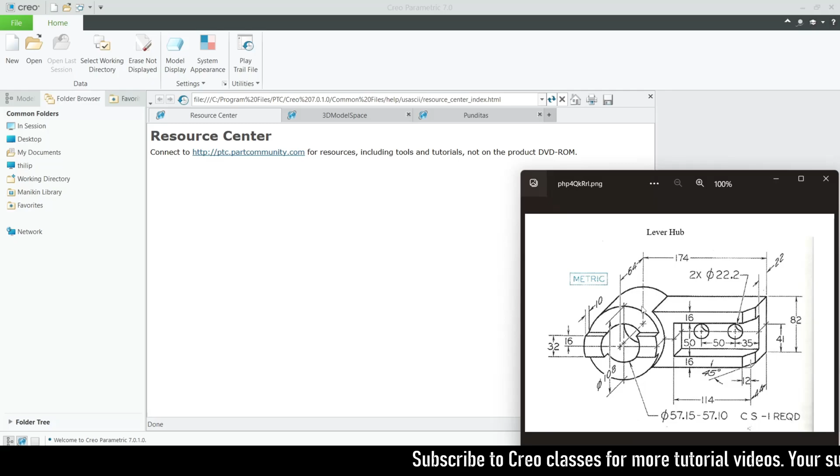In this video, let's see how to create this lever hub using Creo Parametric. First, we need to analyze this diagram and then convert it to the design. We need to create an outer circle with a diameter of 108, and the inner circle, which they've mentioned as a diameter ranging from 57.15 to 57.10.

Let's continue with this circle. First, we need to select the working directory, the same one we've used for the last few videos. I'll select this as a working directory, click on new, click the default template, and rename my file as Lever Hub.

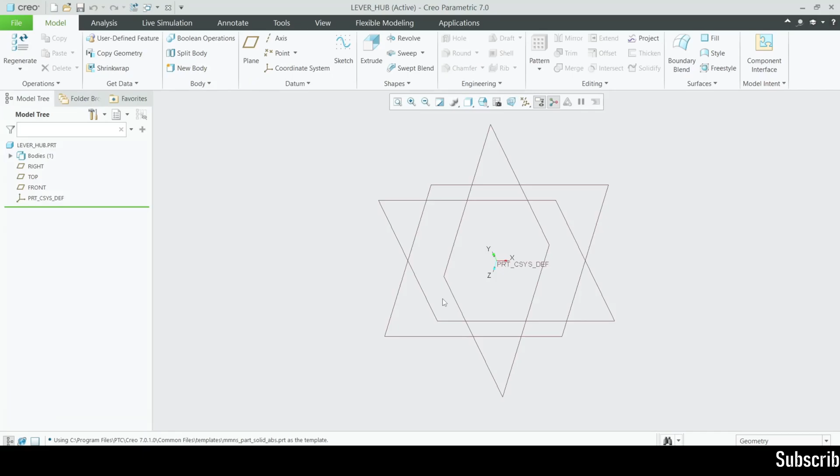Click OK. Now we need to select the template since we unclicked the default template. I'm going to select this as MMNS Part Solid ABS. Click on OK. Now I'm going to start this sketch with my front plane - go for front plane, sketch, and sketch view.

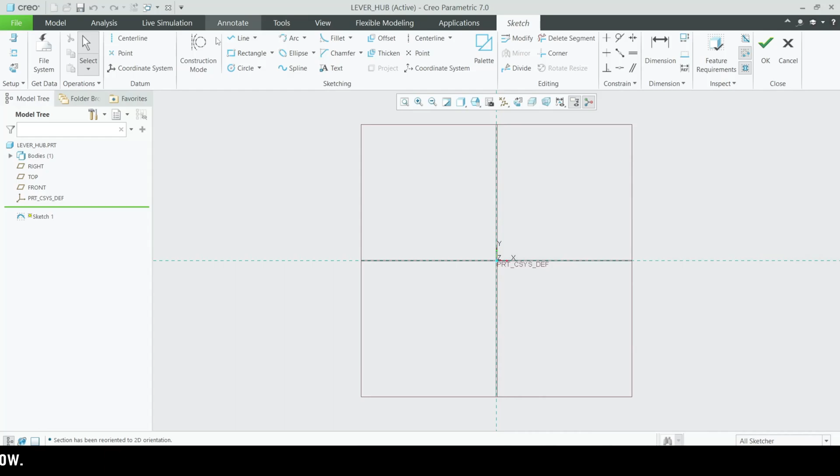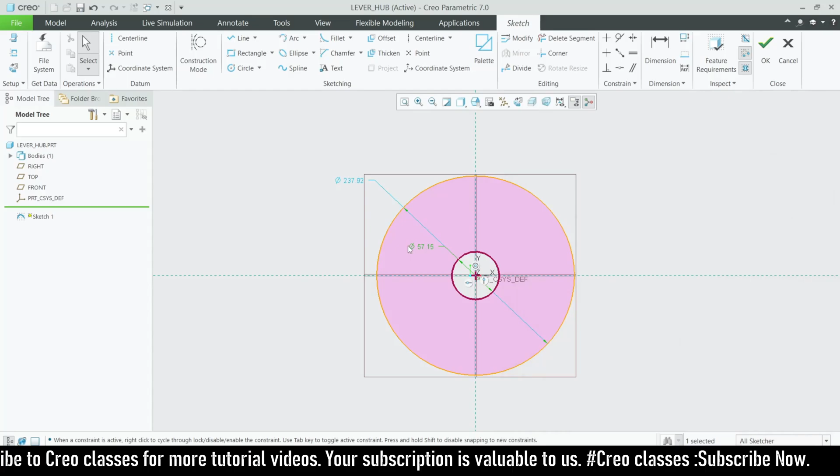First I'm going to create this circular part with an outer diameter of 108 and inner diameter of 57.15. Go for a circle, draw two concentric circles. For the inner dia, as they've provided two values from 57.10 to 57.15, I'm going to take the maximum value of 57.15, and the outer dia as a value of 108 diameter.

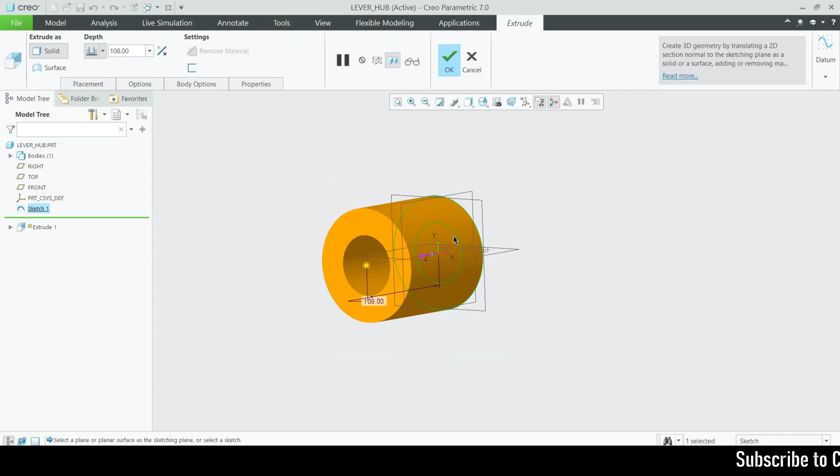Now the sketch has been completed. Let's extrude this part. Before extruding, we have to check how much length they have extruded - they've mentioned 64 here. So let's extrude this part to a value of 64 and adjust this value.

Let's make it a symmetric extrude, or else you can also take the base plane as the front plane, but I'm going to use symmetric extrude for this. Click OK. For a good view, let's go for shading with edges. Now a circular part has been created.

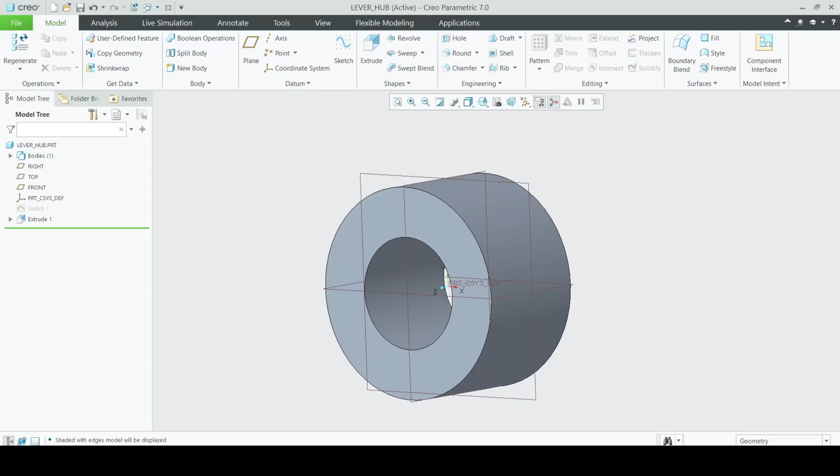Now we have to create a rib here, with the same diameters for those two circles, with an extrude of 10, with a distance of 32, and midpoint of 16. Let's go for a standard view.

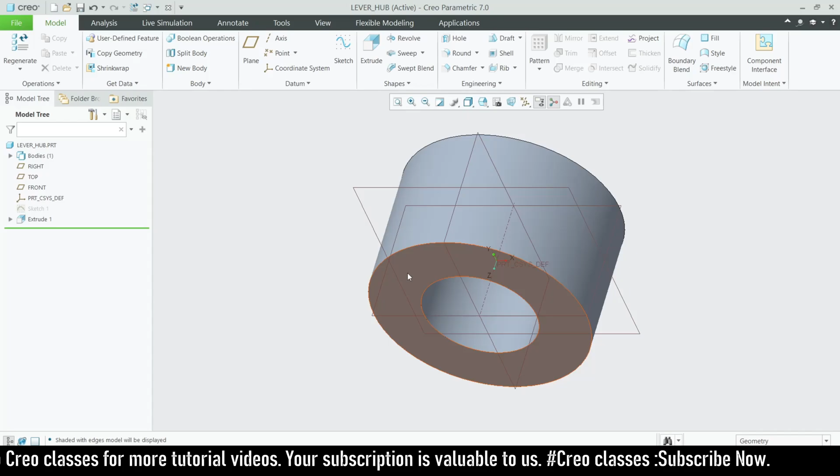Now I'm going to select this surface, go for sketch. Instead of going for a sketch tool, you can also directly move to the extrude tool - I'll show you. You can directly select this face and move to the extrude, and it will automatically move to sketch.

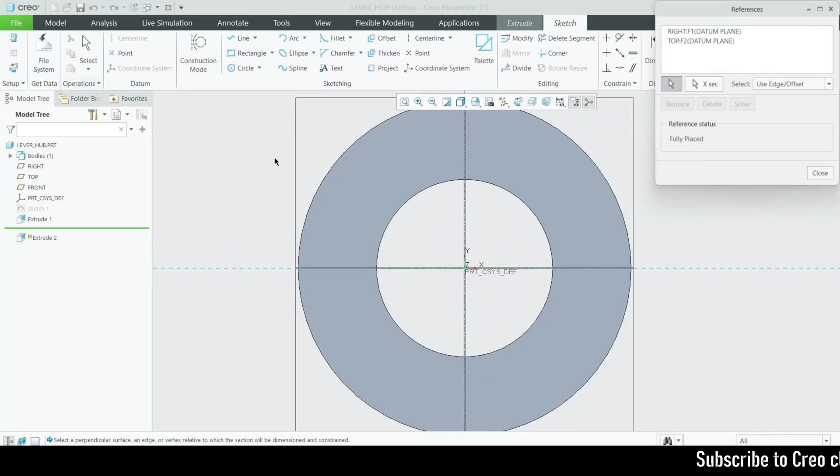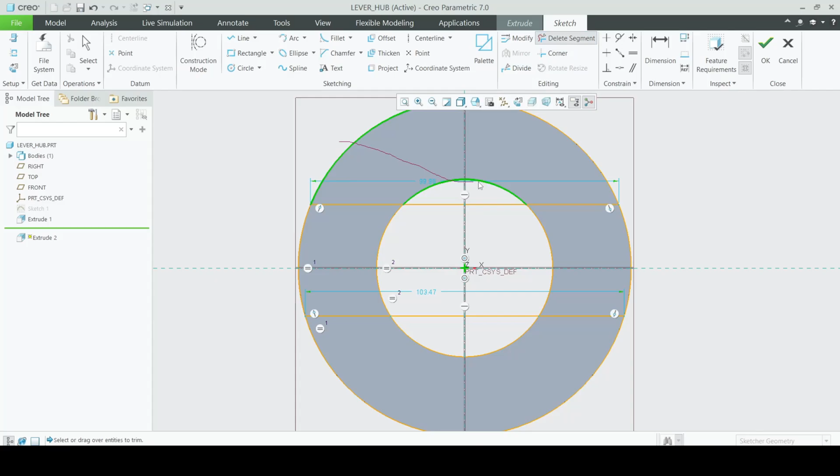Here I'm going to take reference for this circle and this circle, then draw two concentric circles with the same diameter we've taken reference for. I'll draw a line like this and parallelly another line. I don't want to make any kind of constraints for this. After drawing these two lines, I'm going to delete the unwanted segments.

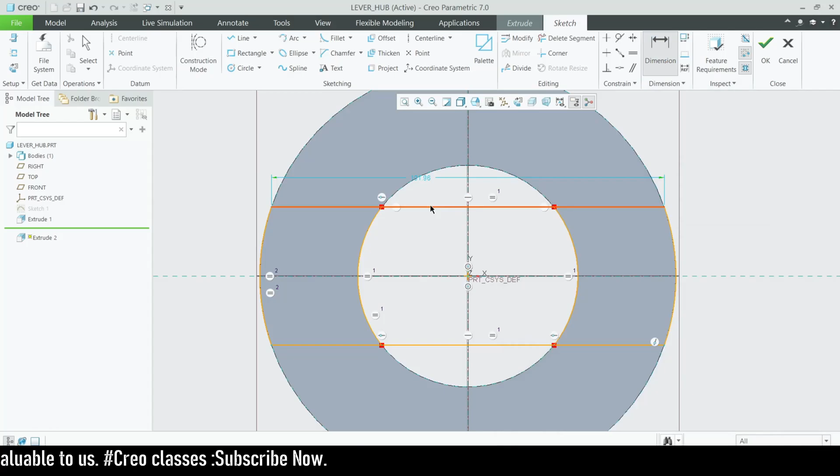Now let's make equal constraints for these two lines, then go for the dimensions. As we see here, this distance is 32 and the midpoint distance is 16. Go for dimensions - I'm going to select these two and enter a value of 32 here.

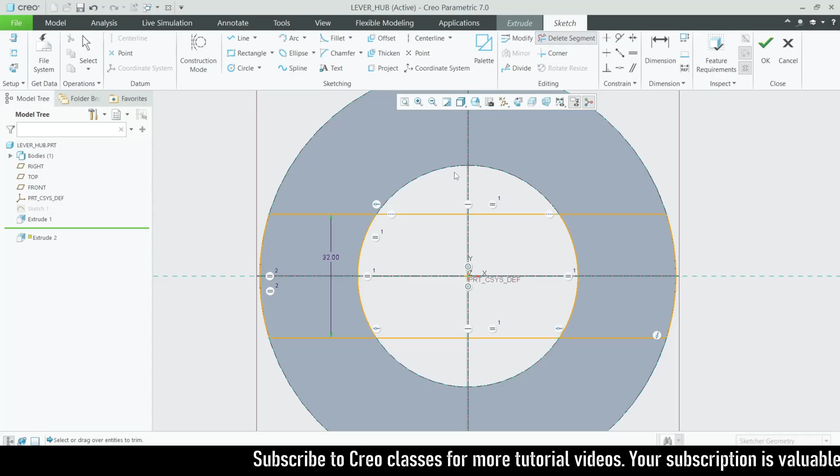Let's check whether this line is placed on the midpoint - as you can see, it is 16, with coincident, horizontal, and equal length options. Let's click the close button and delete the unwanted segments like these lines. As you can see, this line got deleted - don't worry about that. Go for the delete segment tool and delete the unwanted segments.

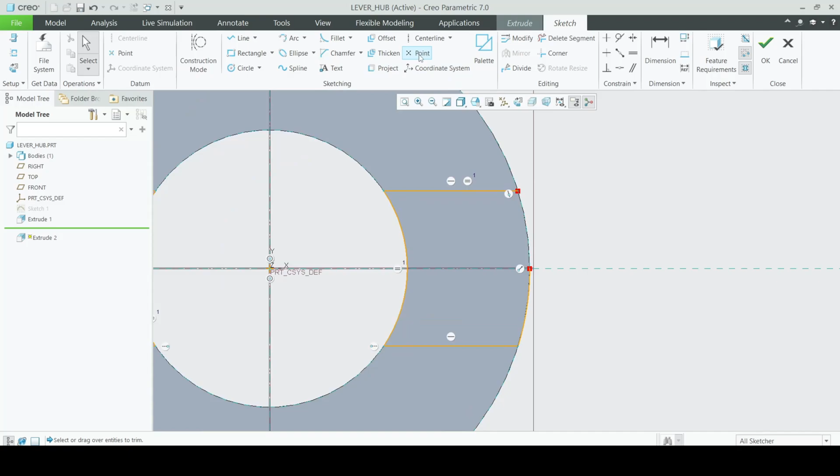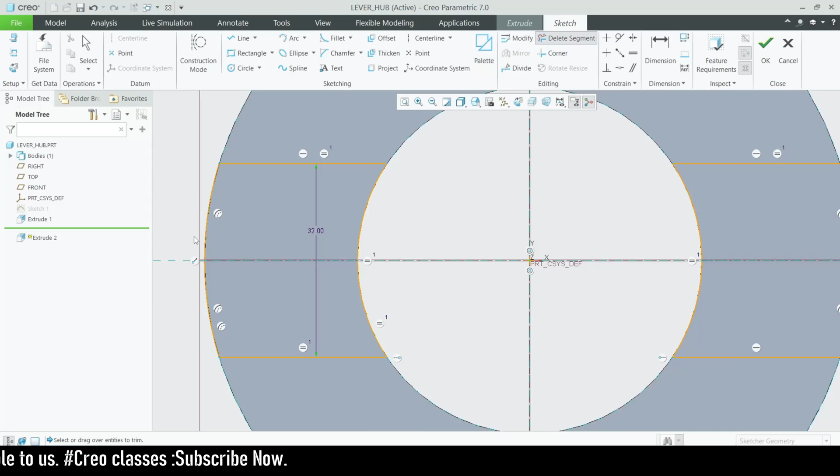It has been overlapped here. Better we can delete this line also - go for delete segment and select this and this. The line will be overlapped, guys, so if you select too many points there, delete this also, and this line also. Now you can see our sketch is completed.

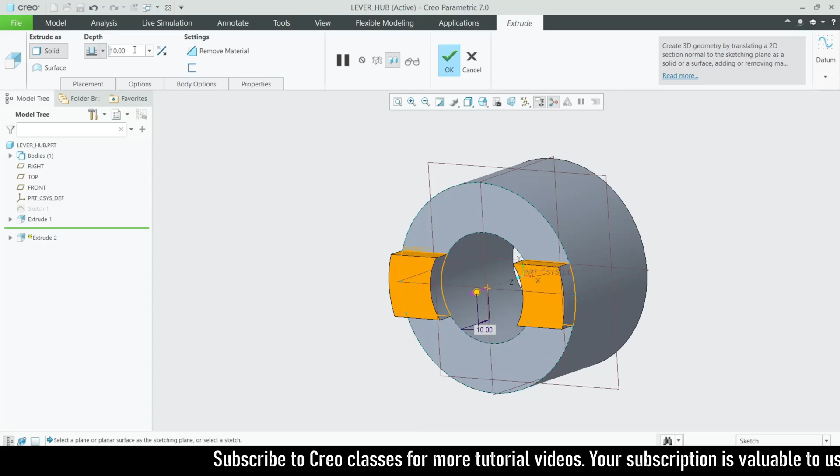Let's see how long they have extruded that part - you can see the distance is 10. Let's click OK, and we have to adjust this distance to a value of 10 here, then click on OK. So our part is completed, guys.

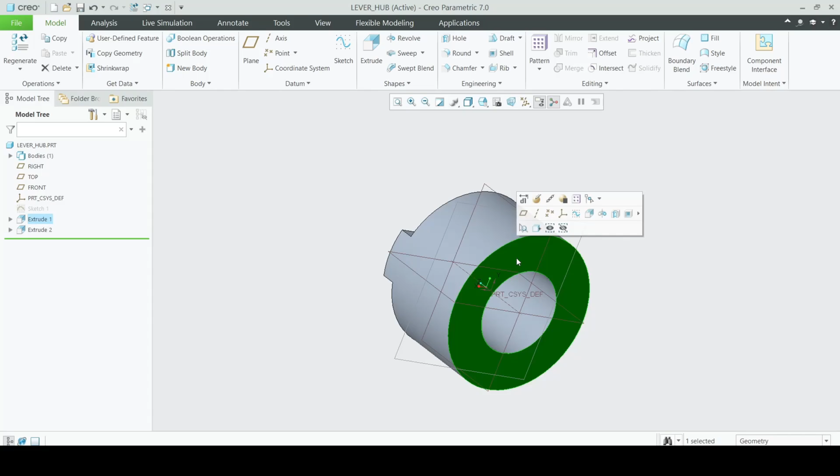This part is completed, so let's go for this part. Now I'm going to select this bottom surface and go for the sketch, also going for the sketch view. Here I'm going to create a rectangular bar - before that, we need to see the dimensions from the midpoint till this edge.

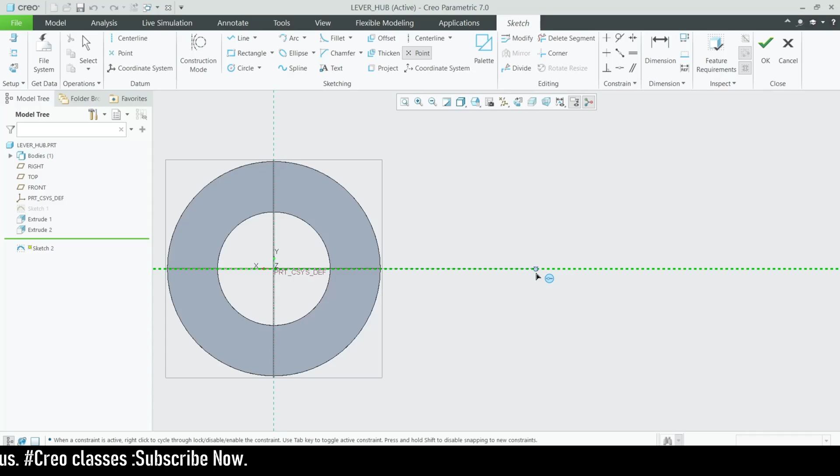It is 174, so let's first create a point here and get ready with the dimensions - 174, this is the total length of the diagram. Then we can draw a line with the height of 82. I'm going to draw a line like this, towards the circle.

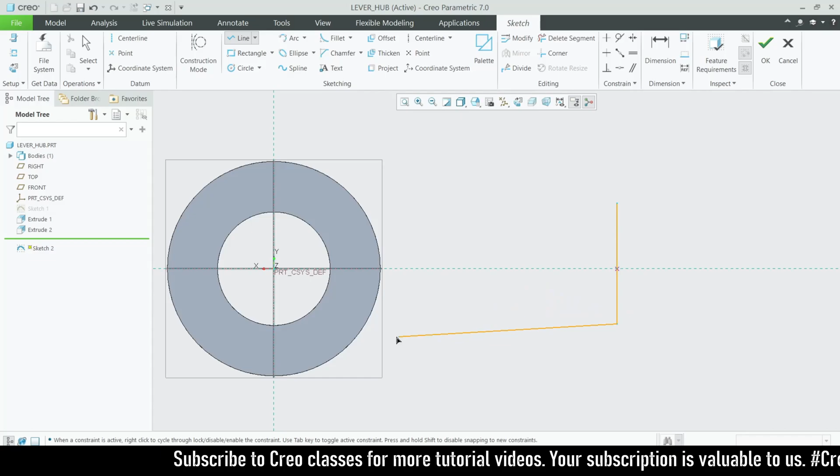Let's adjust this height value of 82, midpoint value 41, so 82 here.

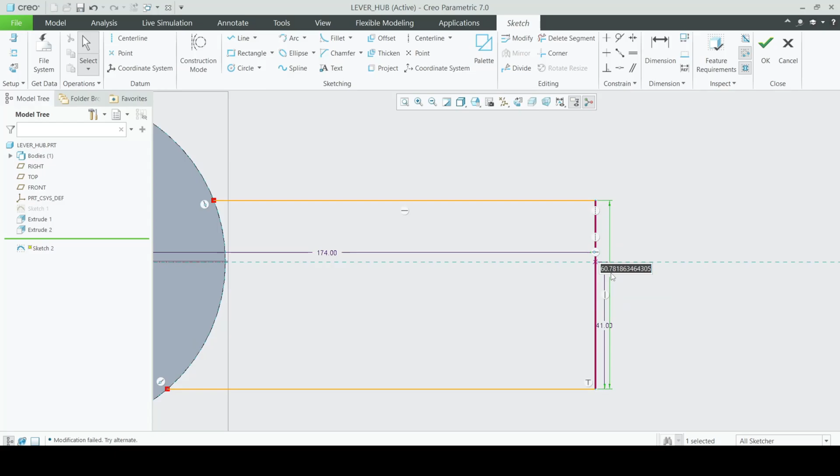For that we need to adjust this dimension, and this as 82. So now the sketch has been completed.

So then I'm going to draw a few more lines inside this part, like this line, without any dimensions, without any coincident constraint.

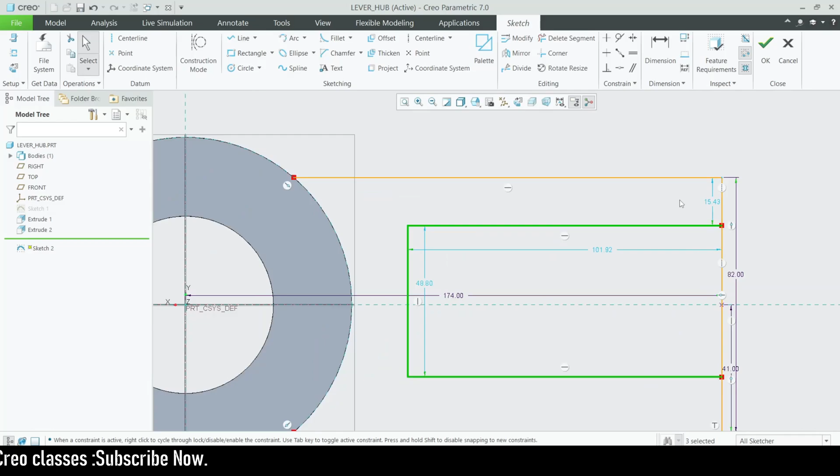Now we are going to adjust this dimension as 16, and this distance as 16. As you can see in this diagram, they have mentioned this distance as 16, this distance as 16, and this gap as a value of 50.

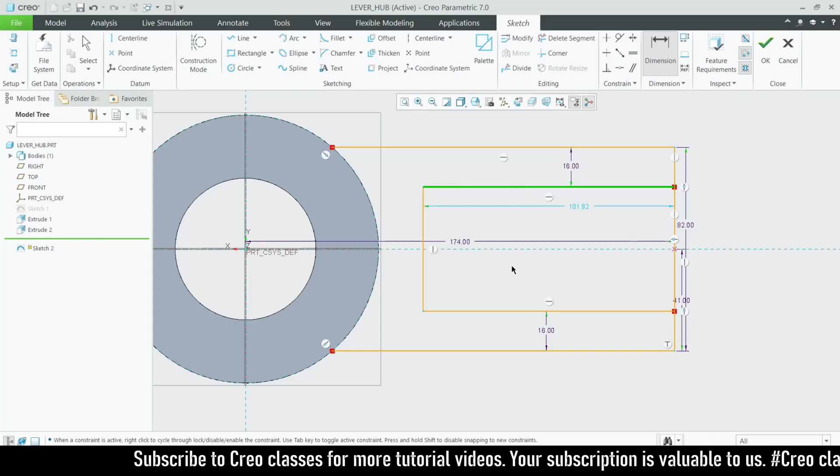Let's check whether the values are entered correctly by clicking this. As you can see, it is 50. So close it.

So now I think we have another dimension here. This line, as you can see, from this line to this edge, it is 114. Let's adjust this to 114.

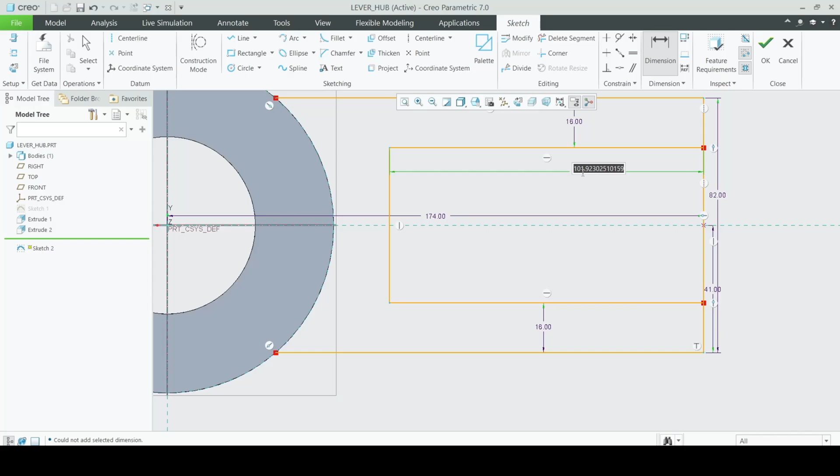Now our sketch has been completed. We have implemented all our dimensions into this sketch. So let's delete the unwanted segments, these two lines, and press escape key.

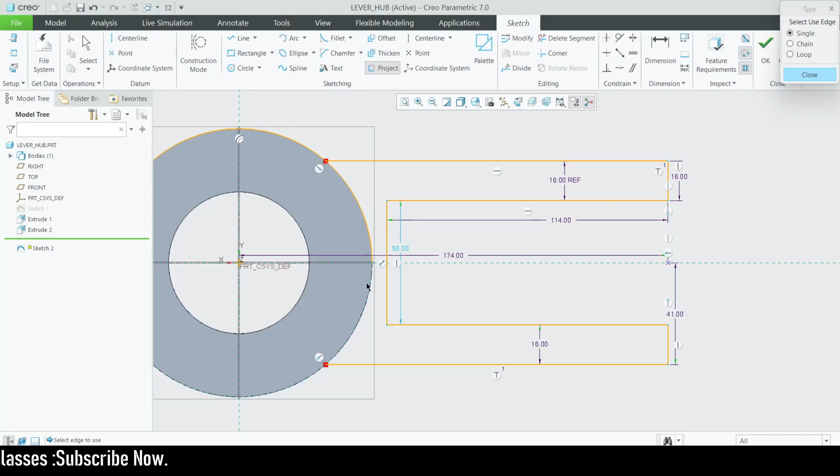As you can see, these two joints are not joined properly, so we can use the project tool for this. Select these 2 points, close it.

Now let's delete the unwanted segments. Now you can see our sketch is completed.

So let's go for the extrude tool here. Click on OK, go for extrude. Now I'm going to flip the direction towards upwards.

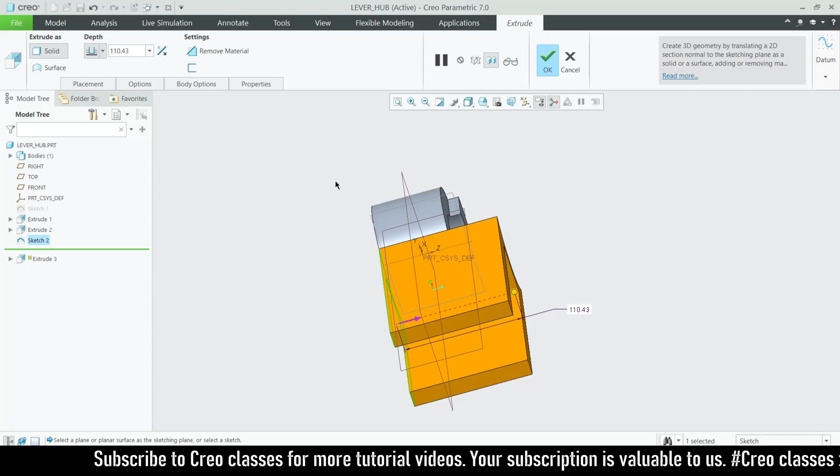Let's see the extrude value that they have provided. Here you can see the extrude value is 44, so let's enter a value of 44 here, and then let's click OK.

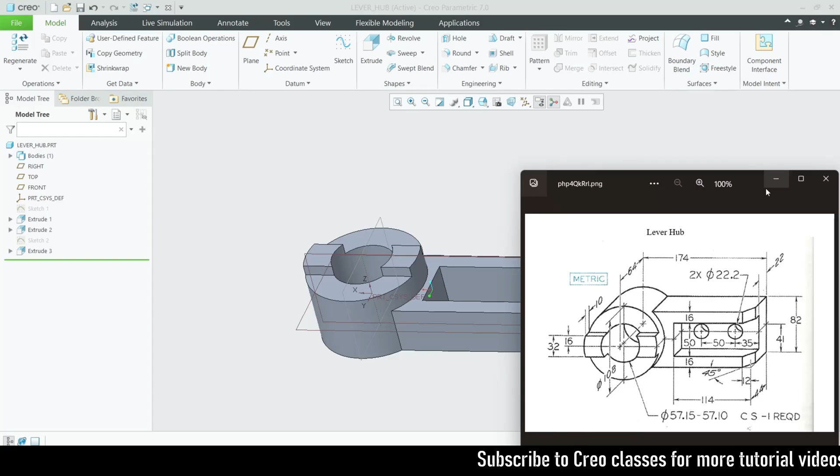So then we need to create another base here, and then two circular parts, two holes. For that, I'm going to select this bottom face again.

Go for the sketch and the sketch view. So here, the same, I'm going to select the corner rectangle tool from this edge to the entire gap, and then I'm going to add two holes here.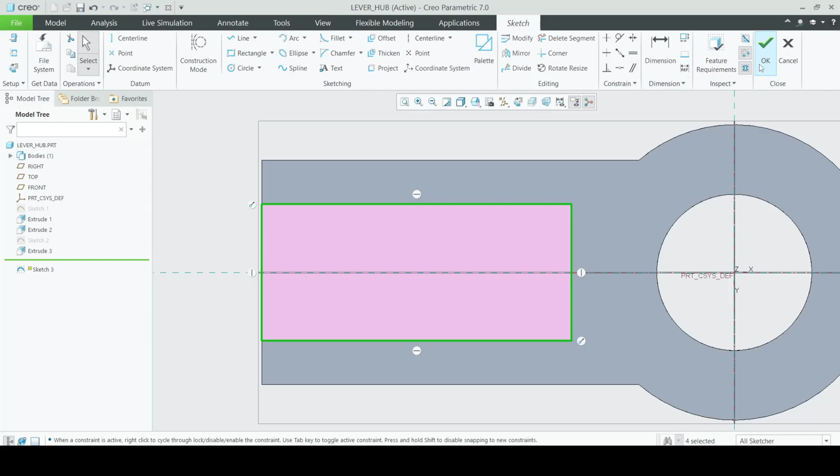You can also create the hole now itself, or you can close the sketch and complete your extrude tool, and also you can go for that.

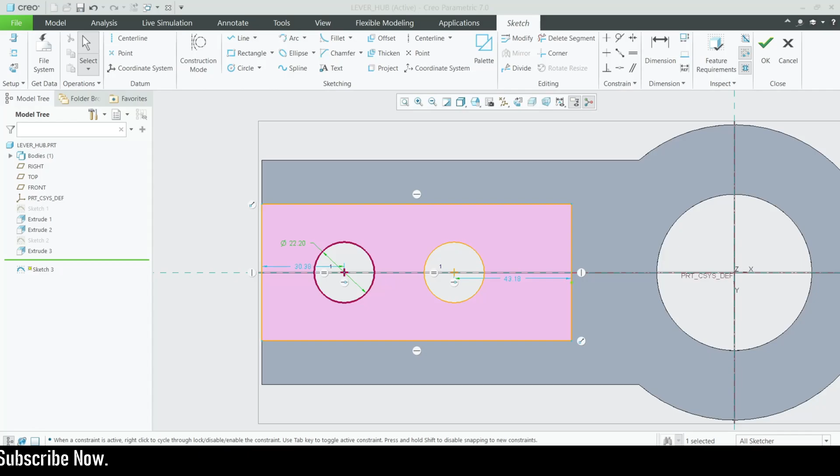I'm going to select this diameter as a value of 22.2, as they have mentioned in this diagram. You can see 22.2. And then the distance from this edge to this midpoint is 35, from this midpoint to this midpoint is a value of 50.

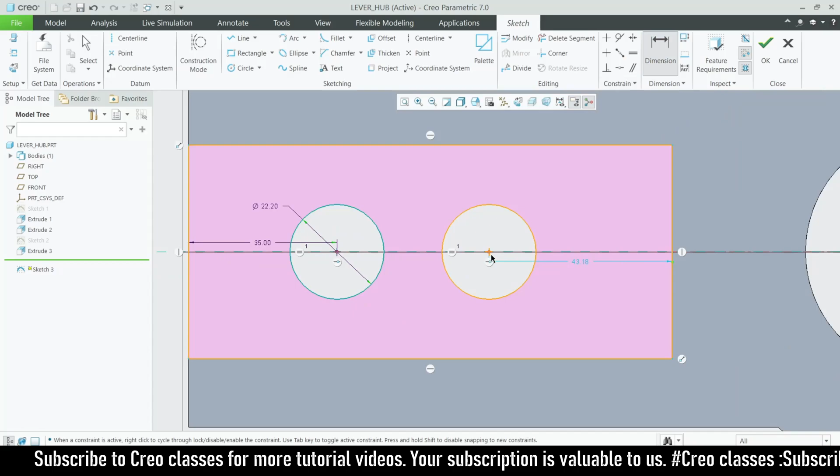So here we need to enter a value of 35. Go for dimensions, to this midpoint and this midpoint, I'm going to add a value of 50 here.

So now our sketch has been completed. Let's click on OK and go for the extrude.

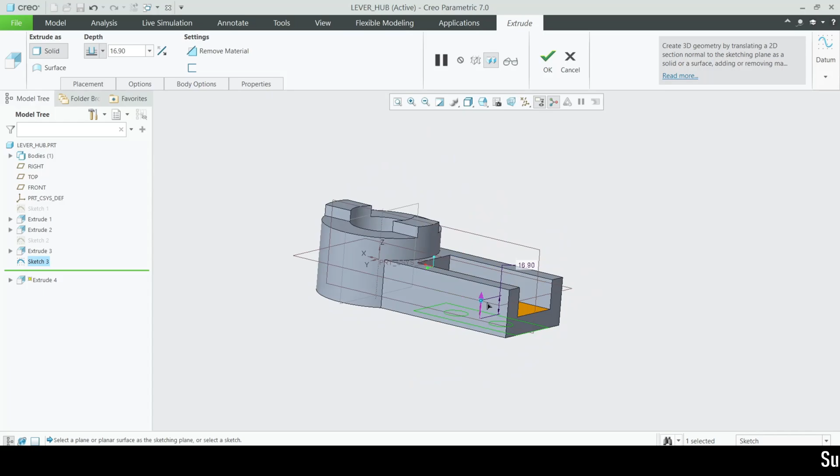So we can flip the direction and drag it towards downwards, and let's check what dimension they have given for this extrude. From this to this, they have provided a value of 22 here, so let's extrude this to a value of 22.

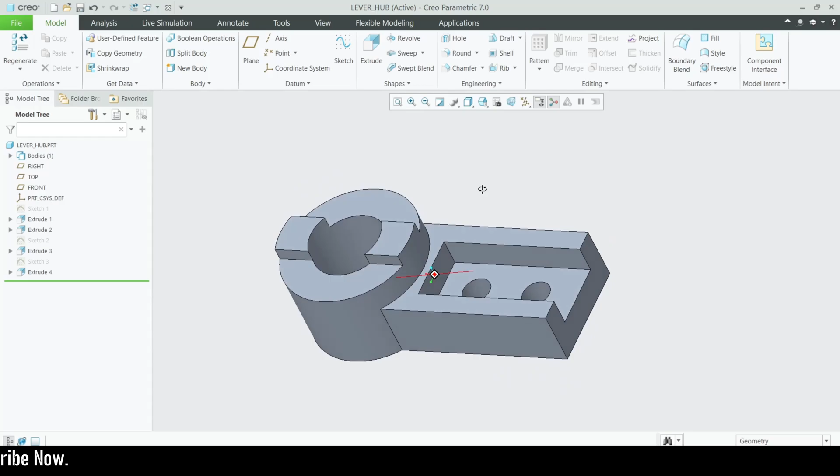So now let's click on OK. Our part is almost completed. Let's check whether all our dimensions are implemented correctly. Yeah, we have almost covered it.

And then we have forgotten about this chamfer tool. You can also use the chamfer tool for this, but they have provided an angle here, guys. You can see this 45-degree angle, the length of 12.

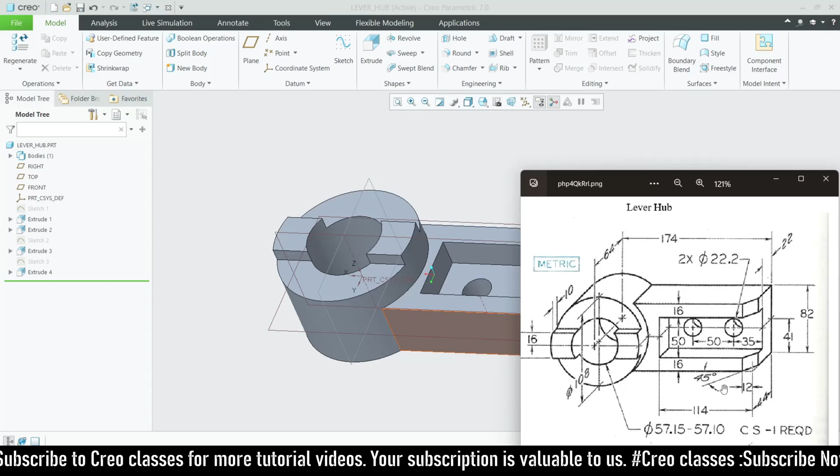I'll tell you the two ways how we can create this chamfer. The first way is a little bit complicated. You can select this plane and go for the sketch, go for the sketch view.

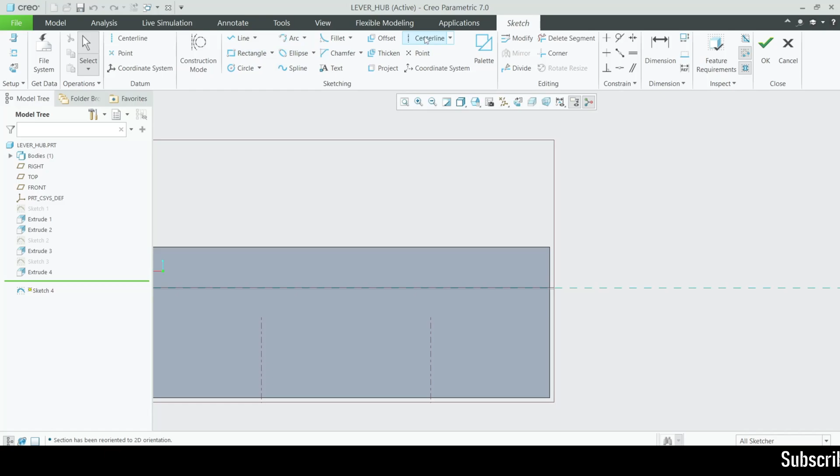Here they have provided the angle, right? So at first you need to create a center line from this plane like this.

Let's enter this dimension value as they have given, the angle as 45. Let's give this as 45.

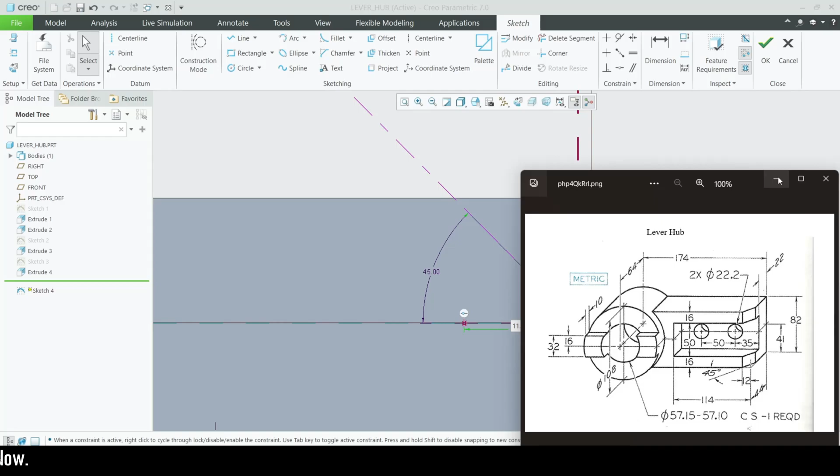Create a point here. Let's adjust this value. They have given 12, right? You can add a 12 here.

And then you have to draw a line parallel to this point, which meets the center line. You can draw a line here, and you can close this line.

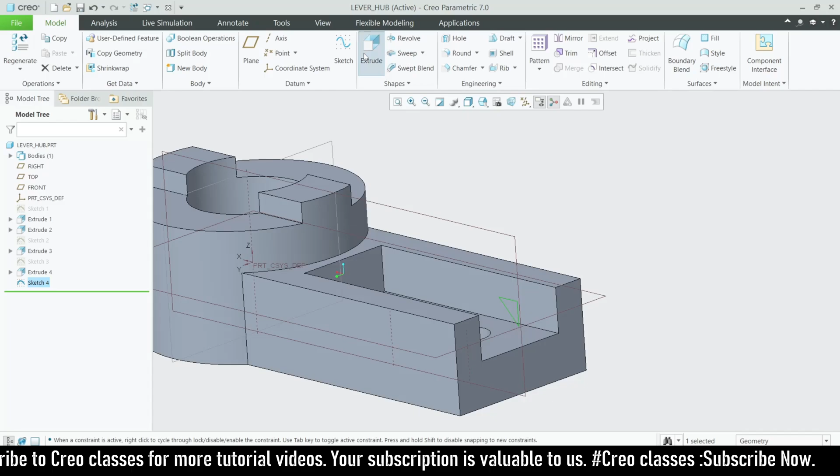Click on OK, let's go for extrude. Drag this and remove material.

So that's one way, you can create this chamfer by using the sketch. They have given some angle tool for you. If you have to implement all the dimensions into the part, you can use this tool. Or else you have another simple way.

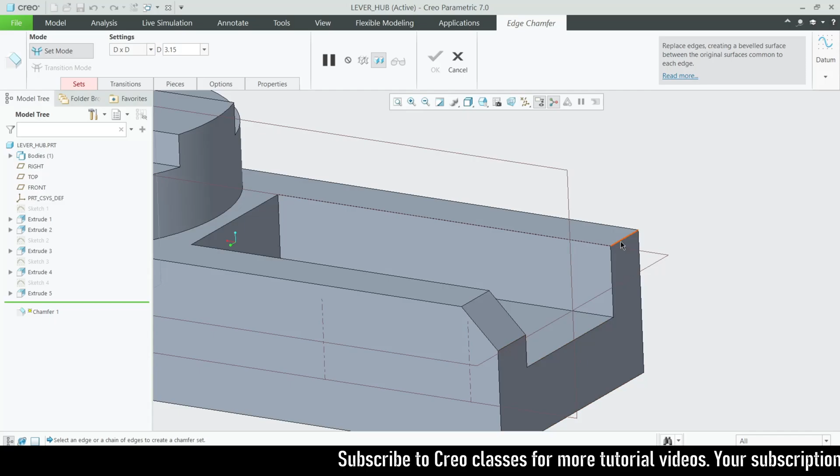You can click on edge chamfer. You can select this edge because the chamfer will occur at 45 degrees itself. Creo will automatically recognize the angle as 45.

You can provide this value as 12 and then click on OK. It is the easiest way to create a chamfer.

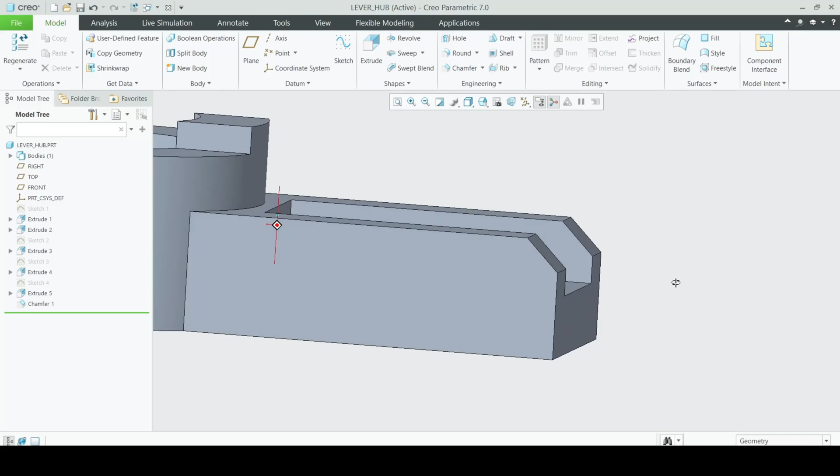Either you can use sketch extrude tool for the chamfer to provide your angle, or else you can use the chamfer tool for that.

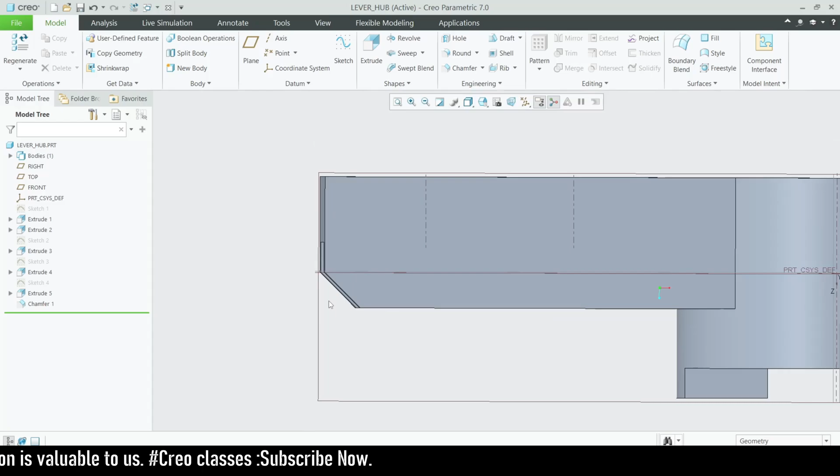So for this, I can delete this sketch and extrude, or I can use the chamfer tool for that. Same 12, click on OK.

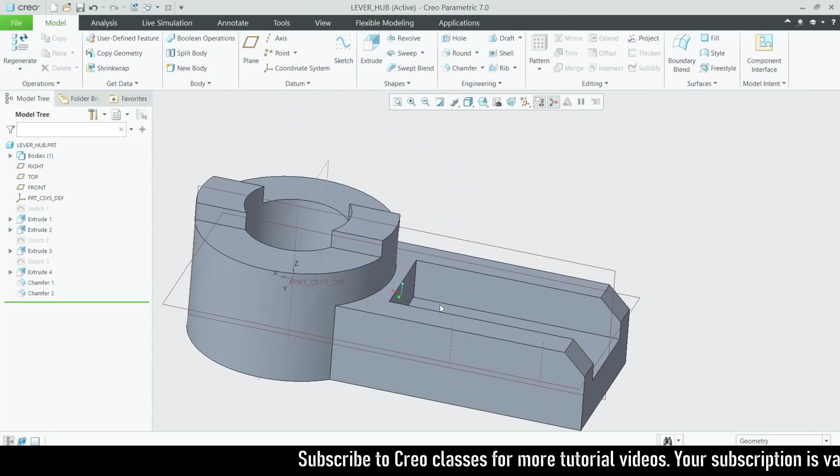Let's remove all the datum planes.

If you want to add any kind of round feature to this part, you can add it on your own because there is no dimension given for round. So we have implemented all our dimensions into this. Let's close it.

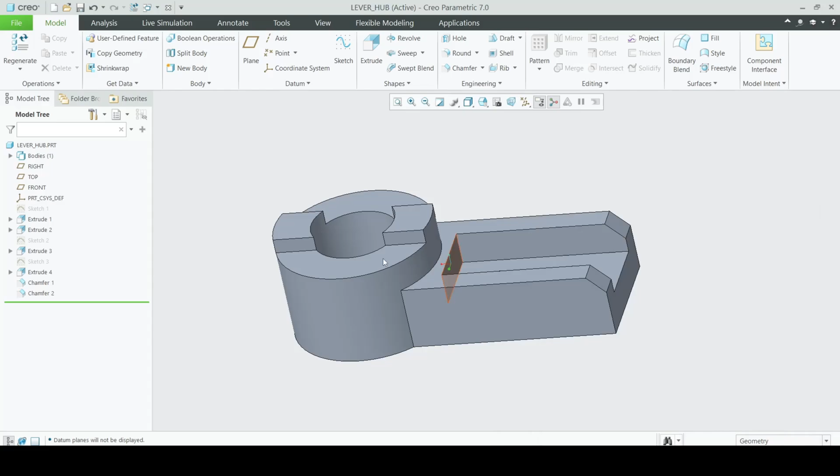Let's add some more appearance for this part. I will provide red color for all the machine parts that we have done on our channel. I'm going to give red color for this.